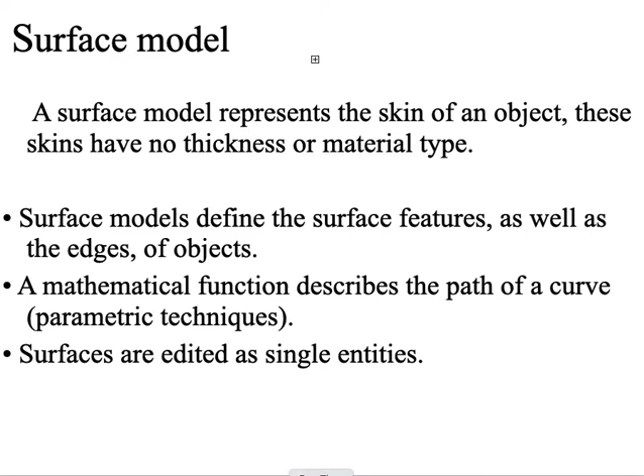Now, the major surface entities provided by CAD/CAM systems are plane surface, ruled or lofted surface, tabulated cylinder, surface of revolution, Bezier surface, B-spline surface, Coons patch, fillet surface, and offset surface.

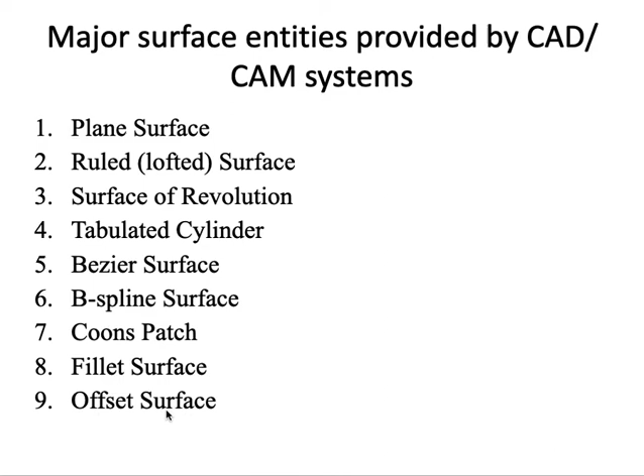So if you see a plane surface, this is the simplest surface; it requires three non-coincident points to define an infinite plane. The plane surface can be used to generate cross-sectional views by intersecting a surface or solid model with it. It generates cross-sections for mass property calculation or other similar applications where a plane is needed. This is one plane and multi-plane you can see here. This is the plane surface.

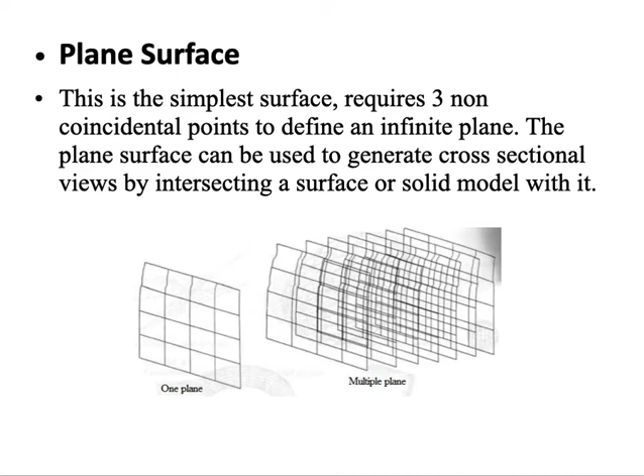And this is the ruled or lofted surface. This is a linear surface. It interpolates linearly between two boundary curves that define the surface, which are called rails. Rails can be any wireframe entity. This entity is ideal to represent surfaces that do not have any twists or kinks.

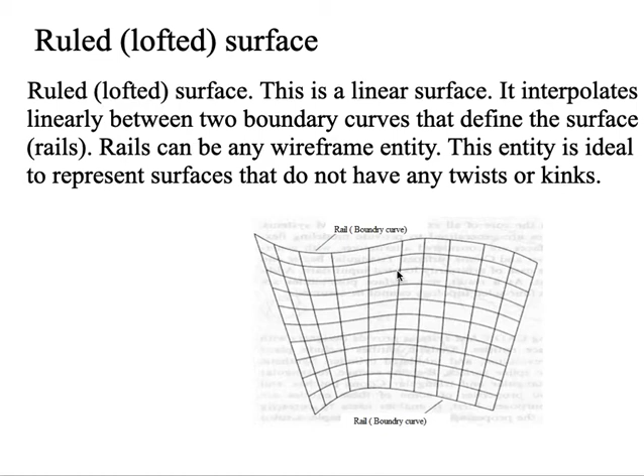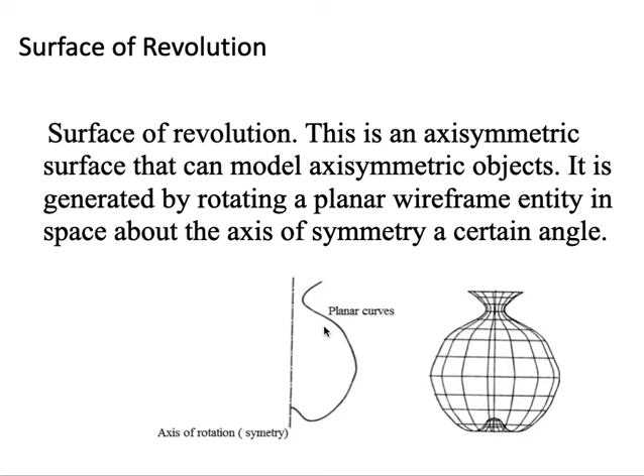Here, the surface of revolution is an axisymmetric surface that can model axisymmetric objects. It is generated by rotating a planar wireframe entity in space about the axis of symmetry a certain angle. This is the axis of rotation. And the next one is the tabulated cylinder.

This is a surface generated by translating a planar curve a certain distance along a specified direction, the axis of the cylinder. The plane of the curve is perpendicular to the axis of the cylinder. It is used to generate surfaces that have identical curved cross sections. The word tabulated is borrowed from the APT language terminology. So this is what a tabulated cylinder is.

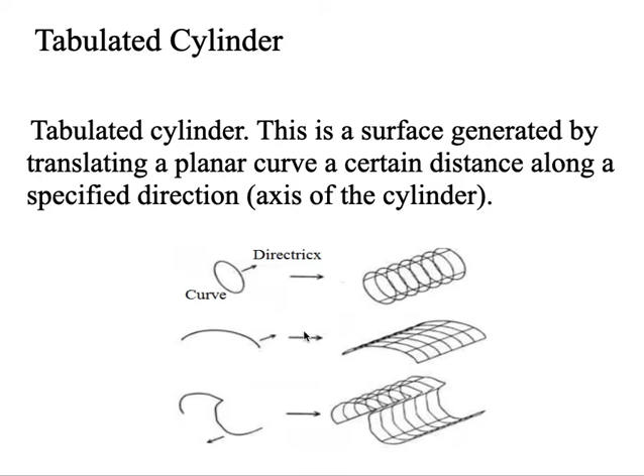Next we can see a Bezier surface. This is a surface that approximates given input data. It is different from the previous surface in that it is a synthetic surface. Similarly to the Bezier curve, it does not pass through all given data points. It is a general surface that permits twists and kinks. The Bezier surface allows only global control of the surface. This is one example of a Bezier surface.

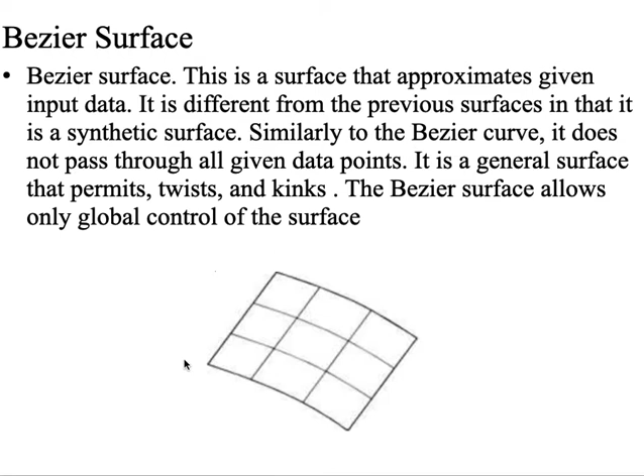B-spline surfaces. A B-spline surface is a surface that can approximate or interpolate given input data. It is a synthetic surface. It is a general surface like the Bezier surface, but with the advantage of permitting local control of the surface. These are the data points, and this is a B-spline surface.

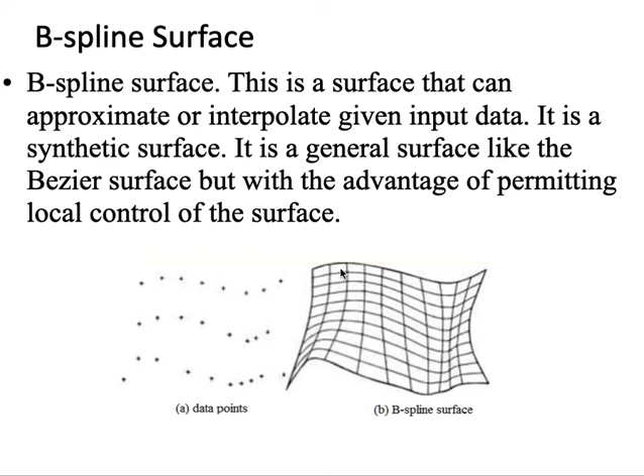And next is the Coons patch. All the above surfaces are used with either open boundaries or given data points. The Coons patch is used to create a surface using curves that form closed boundaries, forming this closed boundary.

And next one is this fillet surface. This is a B-spline surface that blends two surfaces together. The two surfaces may or may not be trimmed. You can see this easily in this picture.

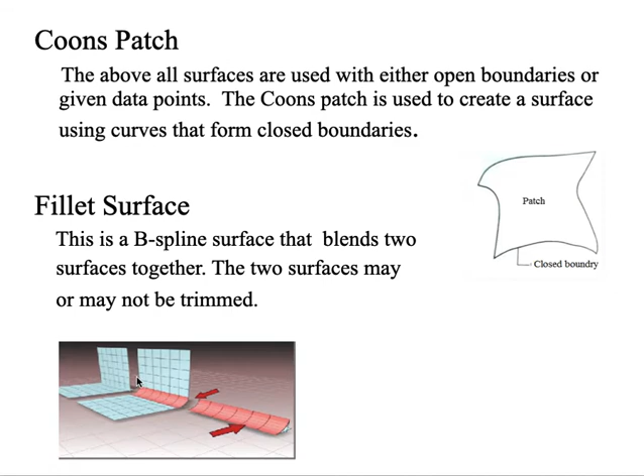Next one is the offset surface. An existing surface can be offset to create new ones identical in shape but may or may not have different dimensions. It is a useful surface to speed up surface construction. For example, to create a hollow cylinder, the outer or inner cylinder can be created using the cylinder command, and the other one can be created by the offset command. The offset surface command becomes very efficient to use if the original surface is a composite one. This is one example of offset surfaces.

This is again an offset of a surface. You can change the dimensions of this; only the offset is important here. A multi offset surface is required if you want to do this.

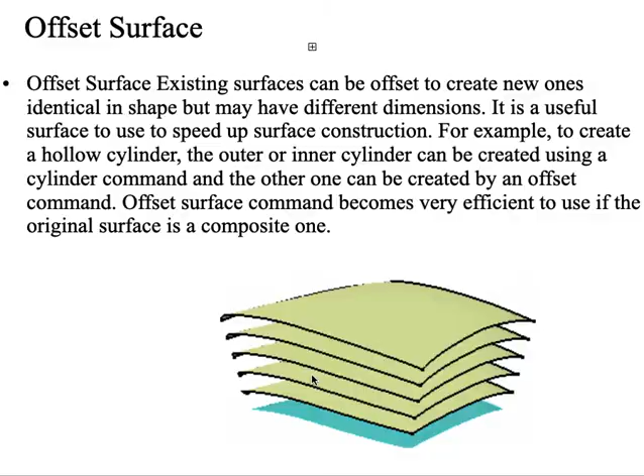Surface representation methods, what are the surface representation methods? The two types of surfaces commonly used in modeling are parametric and implicit.

The parametric surface is defined by a set of three functions, one for each coordinate, as shown below: x of u,v, y of u,v, and z of u,v, where the parameters u and v are in a certain domain. We shall assume that both u and v are in the range of 0 to 1, so u,v is a point in the square defined by (0,0), (0,1), and (1,1) in the u,v coordinate plane.

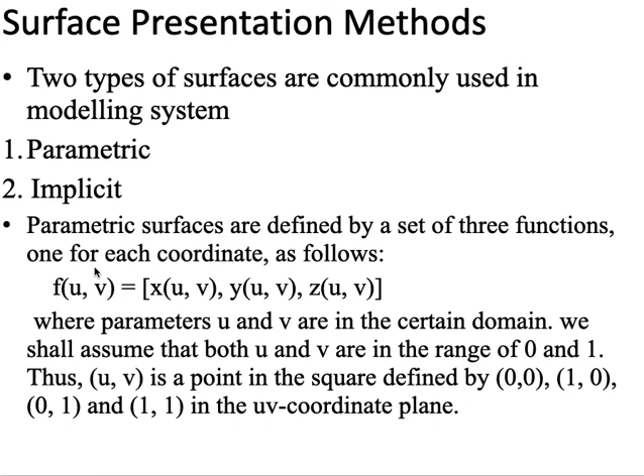An implicit surface is defined by a polynomial of three variables, p of x, y, z, equal to 0. Surfaces which have a polynomial implicit form are called algebraic surfaces. The highest degree of all terms is the degree of the algebraic surface. Therefore, the sphere and all quadric surfaces are algebraic surfaces of degree 2.

The following equation shows a degree three algebraic surface whose implicit equation is 8x squared minus xy squared plus xz squared plus y squared plus z squared minus 8. This is an overall brief explanation of surface modeling.

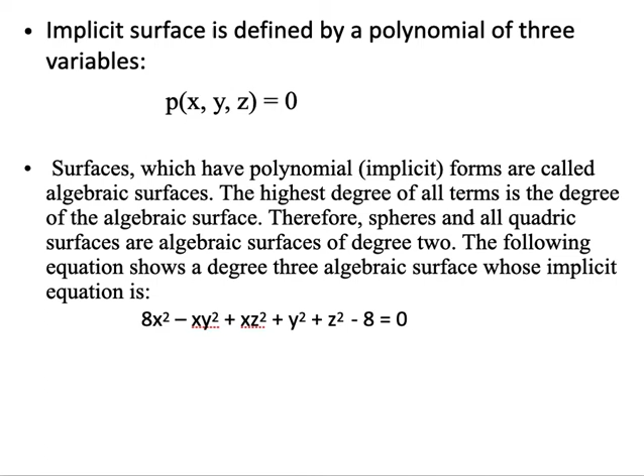Now, what about this surface modeling? Some advantages and disadvantages are as follows. It eliminates ambiguity and non-uniqueness present in the wireframe model. It renders the model for better visualization and presentation, making the object appear more realistic. It provides the surface geometry needed for CNC machining and for mold and die design. It can be used to design and analyze complex free-formed surfaces, such as ship hulls, airplane wings, and car bodies. Surface properties such as roughness, color, and reflectivity can be assigned and demonstrated. The disadvantage is that the surface model provides no information about the inside of an object and cannot be used for calculating dynamic properties.

So this is the overall explanation of surface modeling.